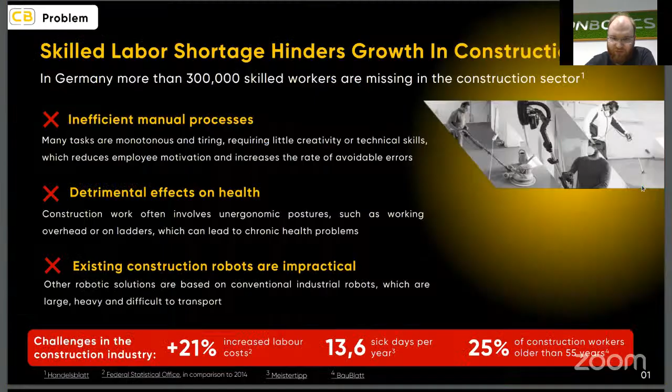Sorry about this. Not used to this laptop.

So basically, the idea is that we want to build robots not at all to replace the worker. We want it to be a tool for the worker, and we want to assist them in doing their job. And the idea is that the robot does the stuff that is easily manageable, that basically just takes time and effort, and it doesn't really make any sense to have a person there to do this, while the painter is still needed for the finer stuff and to really get the job done and also to ensure the quality and so on.

So the quality of the robot is perfectly fine, of course, because in contrast to a worker, it's always doing the same thing. So it's very repeatable, which is also a benefit. So we use less paint, for example, as well. So this increases efficiency. Also, health risks are reduced because, of course, the painting dust is not very good to breathe in. And so that can help with that.

And of course, the bigger issue is also the ceiling stuff, because if you paint the ceilings, you always have to basically spray it in a very unergonomic way. And so this will also, hopefully, increase the health of workers in this area. Right, so the painting robot is the first product that we are developing right now.

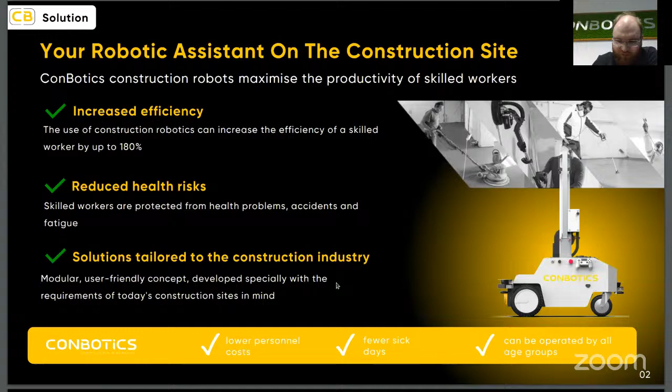Why is it doing this? 1 second. Okay. Yes. Oh, come on. I apologize for the technical issues here. This is not how it's normally going, but... No worries. It's annoying me. I think now I have it.

Okay, there we go. So the basic idea is right now we have the painting robot in development, but like I said, we want to expand in the future. So that means floor coating, which is, for example, for parking decks in parking houses, where you need to coat the floors with specific treatment so that it's more robust, or also sanding, which is basically what you need to do every time you have a new building, that you need to sand the walls first, obviously.

And all those types of jobs are just not good to do. Specifically, sanding and the floor treatment are most of the time very unergonomic. And then, of course, the ceilings as well, like I said. And so we basically want to make tools to help with that.

And in difference to other companies, because this is not the only painting robot on the market, we focus on a lightweight modular build with the idea that we want to be able to have this robot everywhere. So we made it modular, so you can take it apart and easily manage the parts, so you can transport it easier, and you can also bring it more easily into older buildings, for example, where the structural strength might not be as high as it is nowadays in parking decks, for example.

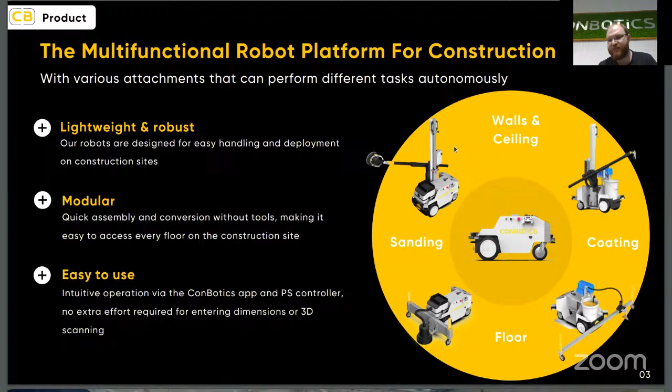Also, ease of use is very important to us. So we basically just want the painter to be able to take up the controller and just start. We don't want there to be any complicated process like scanning the room or anything. So this is all built into the robot. But of course, this means that the robot has to do this itself. Yeah, so this was probably supposed to be a video, but you can see here what I said with the ceiling painting again. Right, I think I covered this basically.

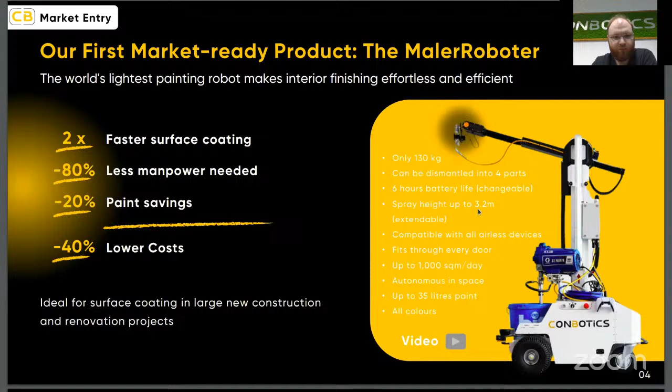Yeah, so key features of the robot are on the right. Basically, we just use an airless system to pump the paint through the robot to the arm and then to the spray nozzle on the top of the arm, and the arm then moves along the wall. Unfortunately, the videos don't work because of, like I said, technical difficulties. But basically, the arm moves up and down along the wall, while the base then moves perpendicular to the wall to basically cover everything. And we repeat that process until it's done.

So the robot arm that we use specifically is self-developed completely from the ground up, because other companies use industrial arms, but those are heavy. And so we wanted a more lightweight solution. So we developed them basically ourselves. And of course, then we developed the software to control all of this as well. And that is also where the AI comes in.

Let's see if there's, yeah, okay.

So what we use the AI for mainly is for ease of use. So when you have a painting robot and you want to cover the walls, you of course don't want to cover everything, right? Like, for example, doors, windows, maybe heaters, you want to just not spray over. So we have 2 cameras on the arm that basically record the room, and that allows us to detect via AI the obstacles on the walls, and avoid them completely, so that we don't waste paint on these areas. And that increases the efficiency.

Also, the important thing is this makes it very easy to use, because other than the obstacles on the wall, we also detect the ceiling height automatically, which means the painter is no longer required to first measure where everything is in the room, or make a complicated 3D scan, or have BIM ready for the whole building. They can just put the robot in there. The robot will automatically, while it's spraying, find everything that it needs to avoid and put these parameters in. So that makes the use of the robot way easier for the painter.

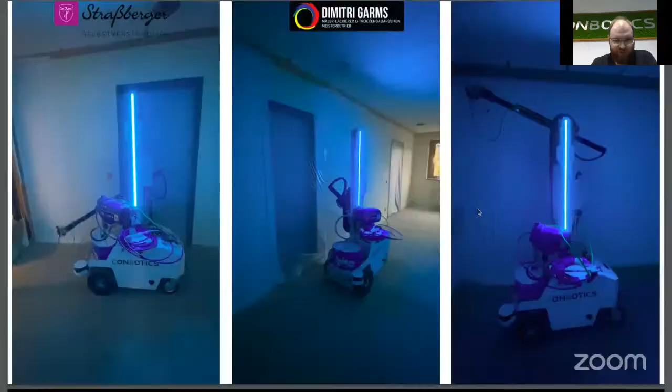So you see here the robot, how it's developed at the moment. And we're already working in a few projects, specifically right now in Germany, and in Switzerland we worked for a bit. So it's already in use.

Unfortunately, I'm not that much in business, so I can't tell you very much about this. But right now we are in a rental phase, so we do not sell the robot right now. That is planned for next year. Right now, we rent the robot out, and we send the robot for a fixed amount per day.

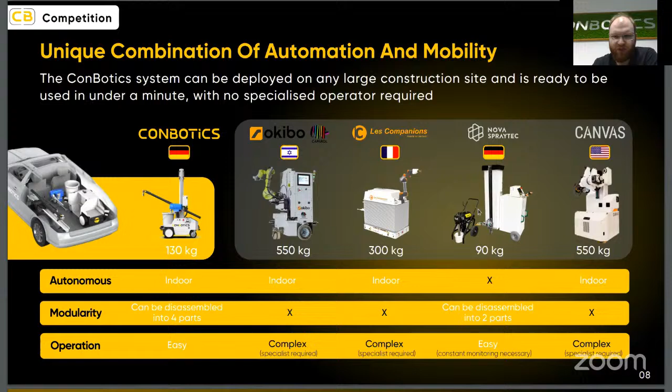Right, here we see some other painting robots. I don't know if this is that interesting, to be honest. But as you can see here, the benefit of our robot is the modularity and ease of use, in comparison to all the others. There are a few more, but those are the main competitors that we have right now that are also in development. So planned, like I said, expansion to other areas will be for 2026. For now, we focus on the painting robot and bringing that on the way completely.

Yeah, basically that's the presentation. So I think I'm done with this.

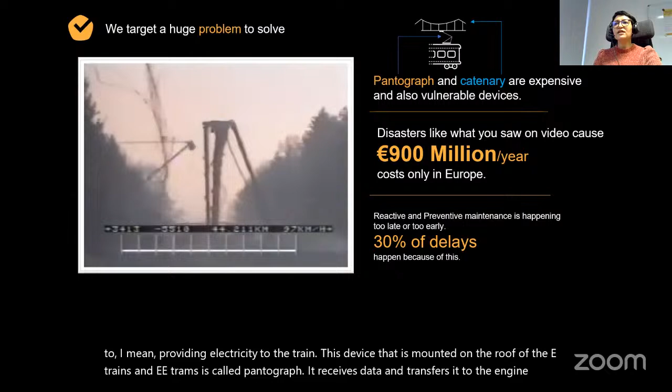So to avoid accidents like that, the maintenance providers should check the quality of the lines from time to time. For example, sometimes they check it every week, and in other cases they use measurement devices and run them under the infrastructure once per 5 years. So they don't have access to online data. The problem is that most of the time they do the maintenance very early, and sometimes it is too late and accidents like that happen.

And all this process increases the cost, which in Europe in general is around 1 billion euro per year. And even worse than that, the delays of the trains and passengers add costs as well.

If I want to summarize the levels of finding the problem in the line, we can divide it into 4 categories, where the more mature one has more reliability and definitely more collected data. The first one is visual inspection, where for example maintenance teams go to the field during the night and just check some specific profiling or maybe very visible evidence of the defect on the line.

The second level, which is very popular now, is that the maintenance team or manager of the infrastructure uses an instrument, for example a measurement train, to collect specific data of the line from time to time. For high-speed trains in Germany it happens once per 6 months, for lines with a lower level of traffic it is once per 2 years, and for most of the cities using trams, it's once per 5 years.

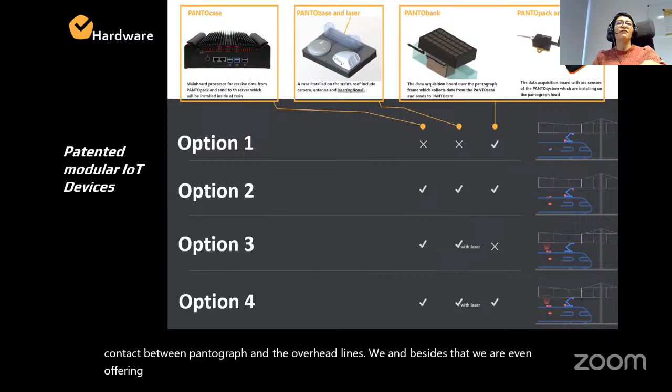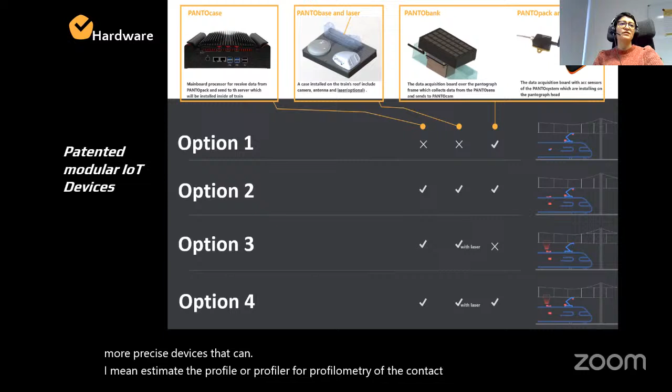The second channel is that if no data is already available, we offer our data collector. We offer different options for collecting different types of data, for example acceleration or visual figures of the contact between the pantograph and the overhead lines. Besides that, we even offer more precise devices that can estimate the profile, or profilometry, of the contact system with less than millimeter precision using laser sensors. So based on our clients' requirements, we offer different devices that can be installed in different parts of the train.

And the third channel is our simulation model. We have heard recently that there are different digital twin models of different systems. But most of them are using 3D models or some specific pictures of that system to generate a model. But in our wording, we cannot just call it the digital twin of that system, because a digital twin can predict or analyze the behavior of that system as well.

What we have done in our company is develop a model that can simulate the interaction between the train, specifically the pantograph of the train, and the infrastructure overhead line. So we are capable of simulating different scenarios of the running train under the infrastructure, and besides that, we can simulate some defects. Therefore, if we call the other digital models just models, the model that we have tried to develop has a kind of soul that can be used to analyze the behavior of the system.

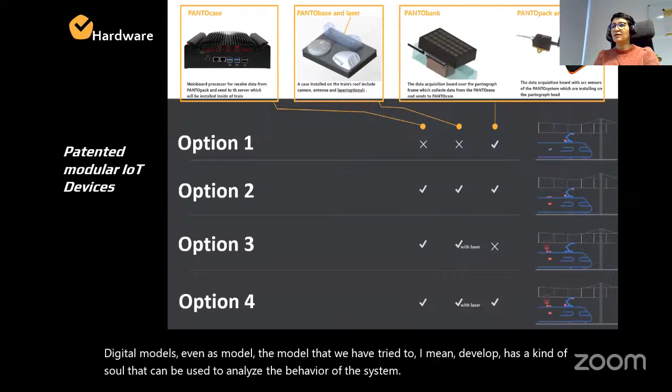So yeah, I know I should go to this side. Okay. After we collect different types of data, we use AI models, machine learning models, to analyze it, detect anomalies, and after that report it to our clients.

In my last slide, I showed how we are doing it. What we can offer to our clients can be categorized as answers to 3 main questions: Where is the underlying problem? What to do to solve the problem, and when is the best time to do the maintenance? How do we deliver it? This is just a screenshot of our panel. It's a comprehensive one where the user can choose the time of the train travel, even the hour of the train travel. Besides that, they have some statistics of the train journey and statistics of the generated defects.

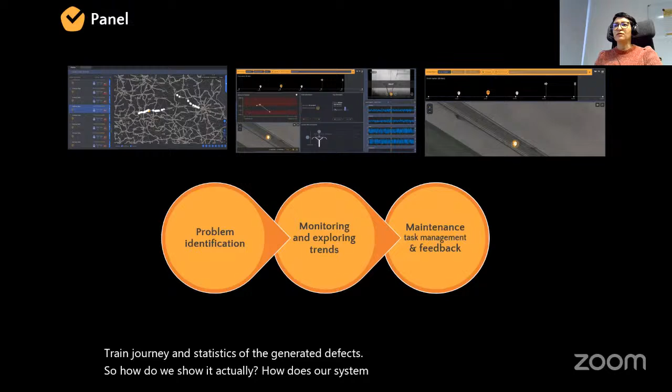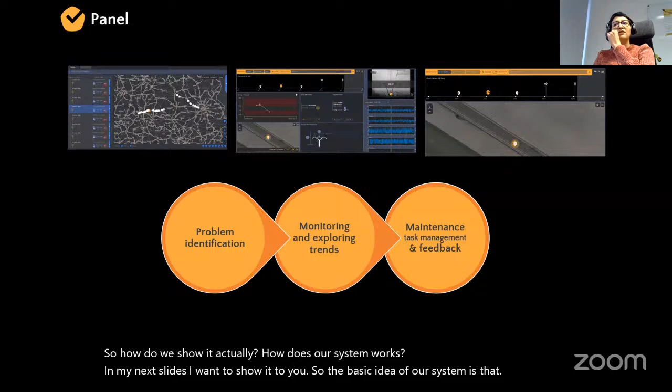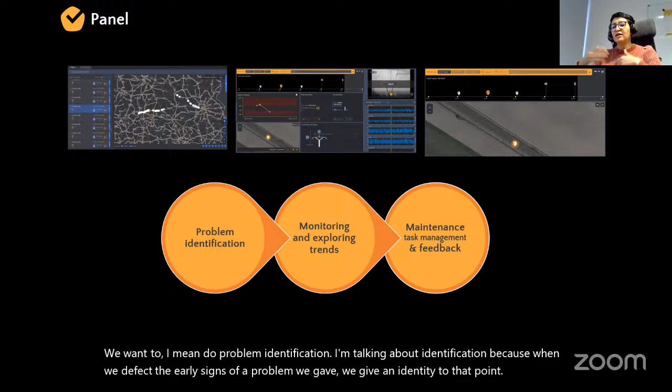So how do we show it? Actually, how does our system work? In my next slides, I want to show it to you. The basic idea of our system is that we want to do problem identification. I'm talking about identification because when we detect the early signs of a problem, we give an identity to that point. And when the trains travel repeatedly... oh, sorry.

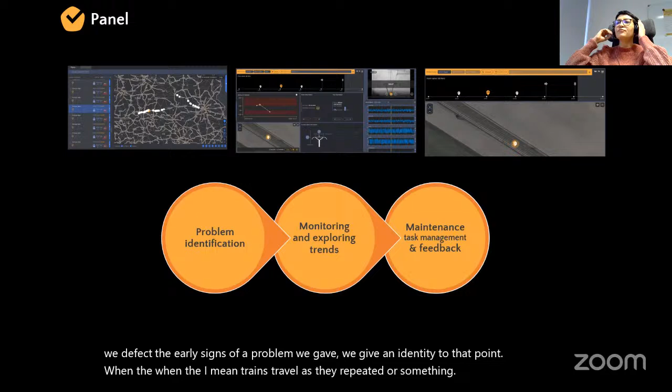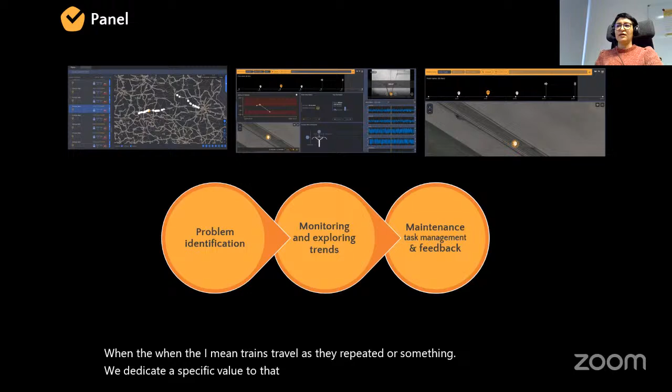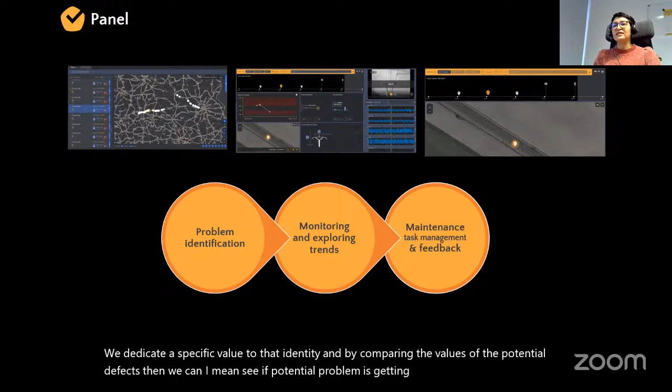So we dedicate a specific value to that identity. And by comparing the values of the potential defects, we can see if a potential problem is getting worse or if it is in the safe margin. And then we can recommend maintenance. In this next slide, I want to just make a summary of what we are doing in our company.

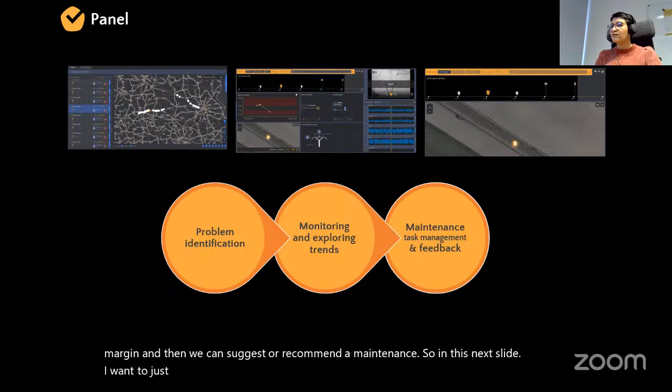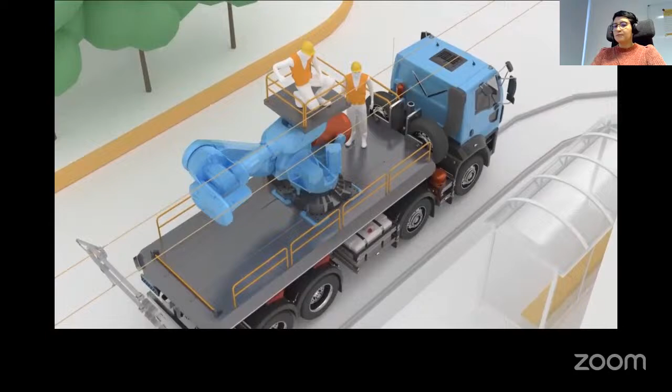Technology has transformed the world over the last 30 years. Cars, phones, computers, everything has changed. But what about overhead contact lines and pantographs? Even today, most companies still check their lines every 6 months to 2 years and record their data on paper, PDFs, spreadsheets, or old-fashioned software. This leads to massive delays, costly maintenance processes, and even bigger problems down the line.

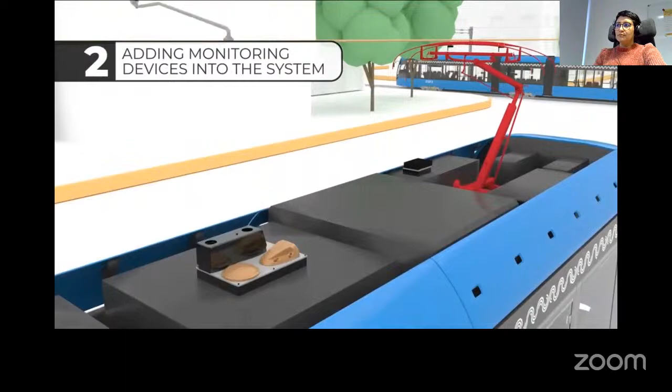Panto Health is on a mission to modernize the entire process step by step. First, we import your current data into our panel, enhancing its readability and efficiency. Then we add our affordable and reliable devices into your system. These devices generate real-time monitoring data, which keeps you updated on any issues. The next step is to process this huge amount of data, extract insights from it, and create a digital twin of your network that helps you monitor all its points.

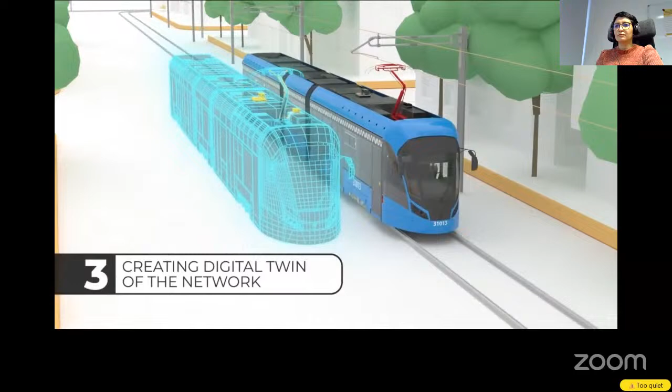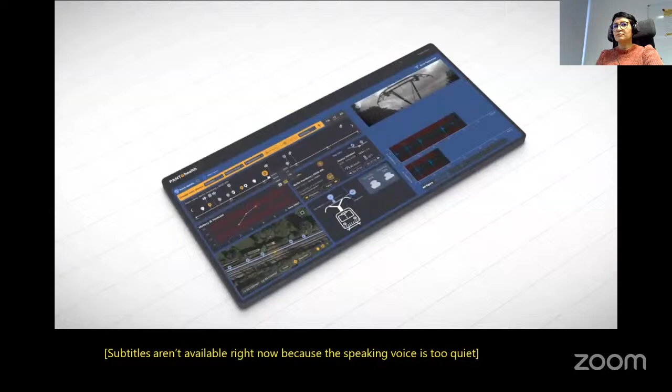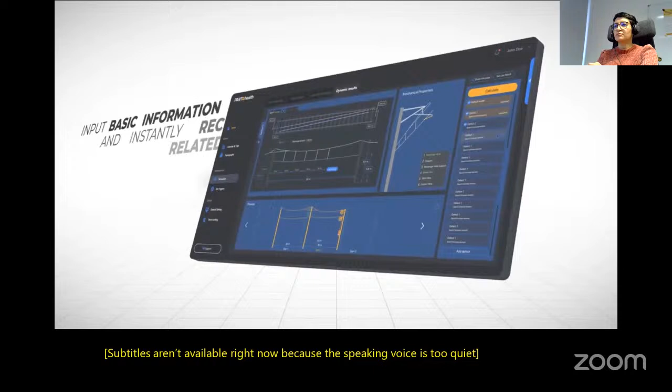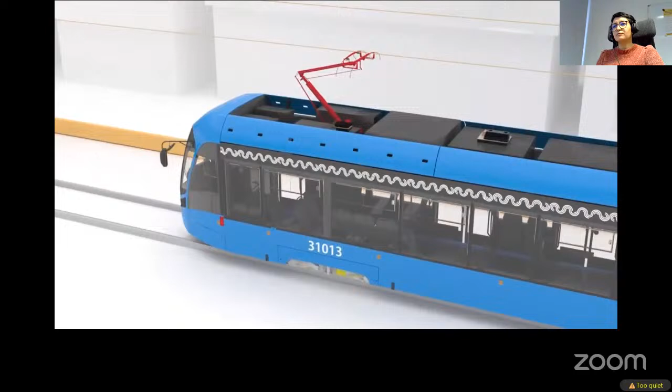By accessing our all-in-one interactive dashboard, you can view the list of abnormalities and easily navigate them on the map. If you require more specific details, click on a point for in-depth details, metrics, and related video, all at your fingertips in moments. With the Panto Health Simulation tool, embark on a 3-stage adventure. First, input basic information and instantly receive related results. Then, model within the system by adjusting pantographs and creating varied scenarios. And finally, receive a detailed report from the panel, which helps in selecting the optimal choice and minimizing real-world risks effortlessly. We provide you with a smart way to achieve the most optimal network with the lowest maintenance costs. Panto Health. Keep your railway system running at its best.

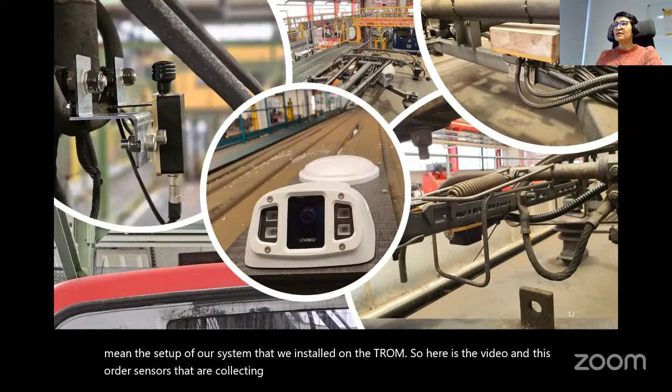So now we go to the last part, which is related to the real cases. Here you see the setup of our system that we installed on a tram. Here is the video, and these are the sensors that are collecting acceleration signals. And then there's a device that collects and sends the rest of the data. Here is another sample that shows how we need to customize our design based on the different designs of the train and pantograph. The camera is installed here.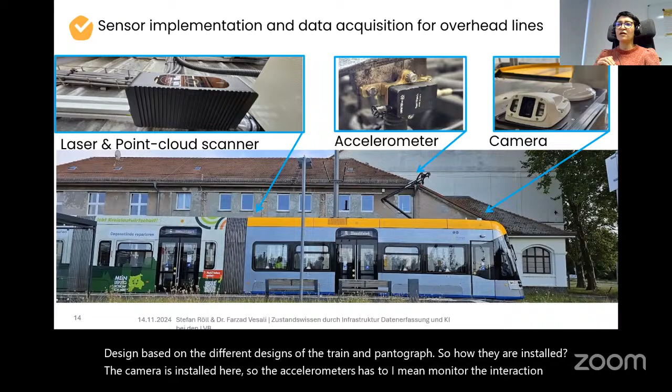The accelerometers have to monitor the interaction between the pantograph and the lines. Therefore, they should be as close as possible to the infrastructure and the contact point. And the other devices, for example a laser scanner or in some cases a point cloud scanner, can be installed on the roof of the train as well.

How are we using it? When one train passes a specific point and the sensors receive considerable shock, as I told you, we save the location of that specific point. And at that specific time, based on our own analysis, we allocate a score to that specific point of the line that we call the health index of that specific point.

When the tram or train travel repeats, in some cases that health index increases. So it means that the infrastructure is in a healthy situation, or maybe the data that we received from our sensor was noisy or had some problems. But whenever it shows that the chance of a defect or the risk of the line is increasing, the health index reduces. And it is all happening based on the repeated data. As I told you, continuous condition monitoring of the interaction between the device, the pantograph, and the infrastructure.

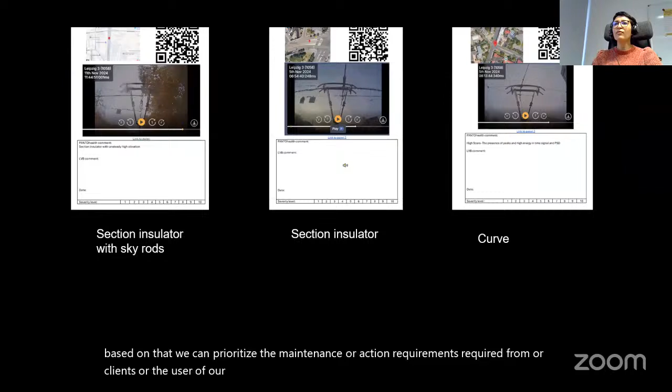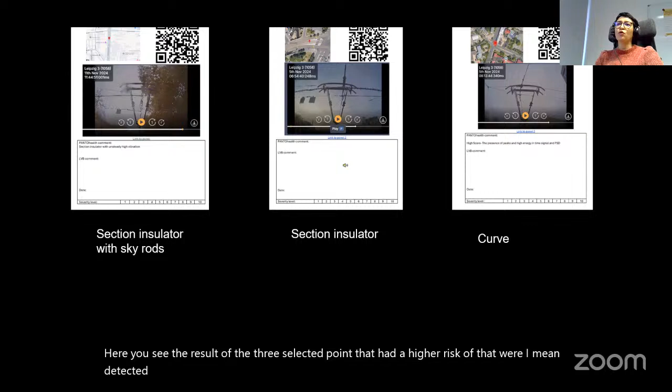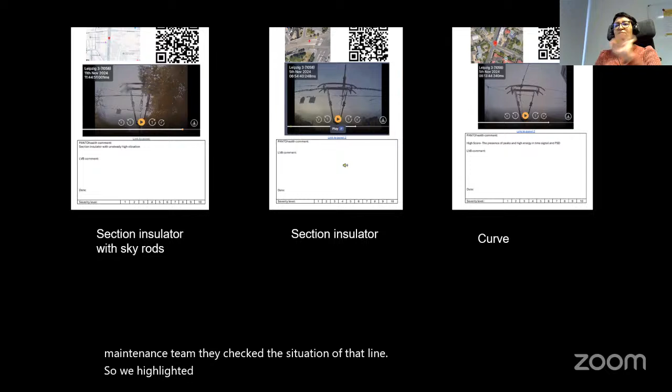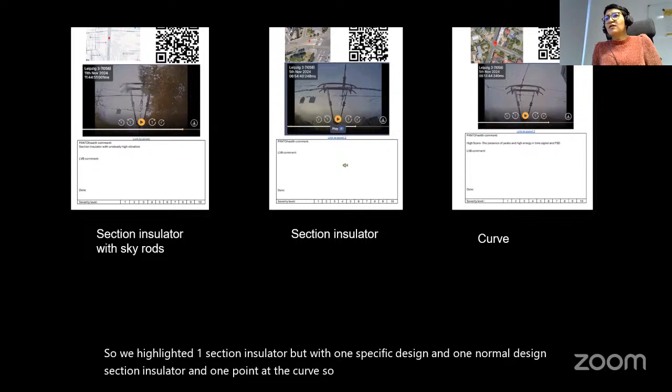Here you see the result of the three selected points that were detected as high risk points, where one of my colleagues went to the field and, with the maintenance team, they checked the situation of that line. So we highlighted one section insulator with one specific design, one normal design section insulator, and one point at the curve. For those specific points, the vibration, and specifically lateral vibration, had significant evidence that something is not normal there.

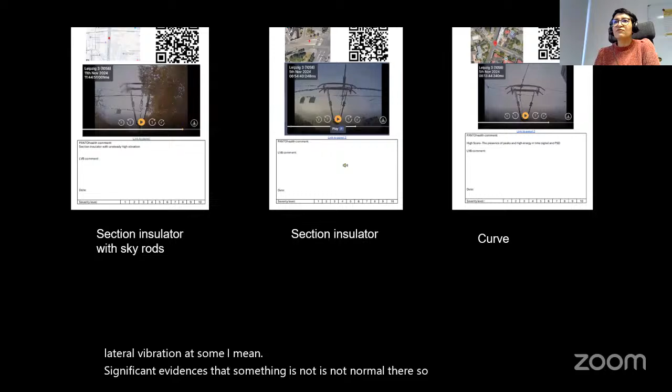So first, I go to the first point. The first point, I told you that it has a specific design. This specific design they call a sky rod actually supports the pantograph to have a smooth contact with the contact wire. But when the train was traveling, it faced an impact or a shock at the beginning of the contact point.

And when my colleague went to the field, he noticed that at the entrance, you can see here there are some wears, because of the high speed of the tram and the impact that this rod faced. So we asked the maintenance colleague to adjust the height of these two tiny wires. You cannot see them; they are actually handling the weight of the section insulator.

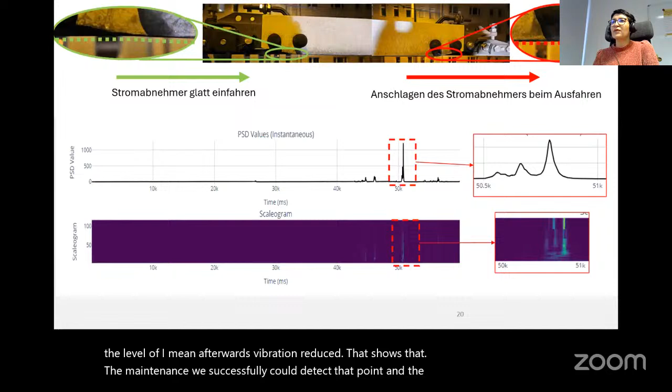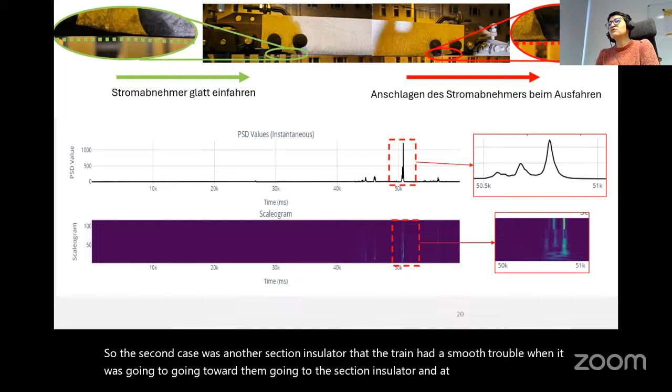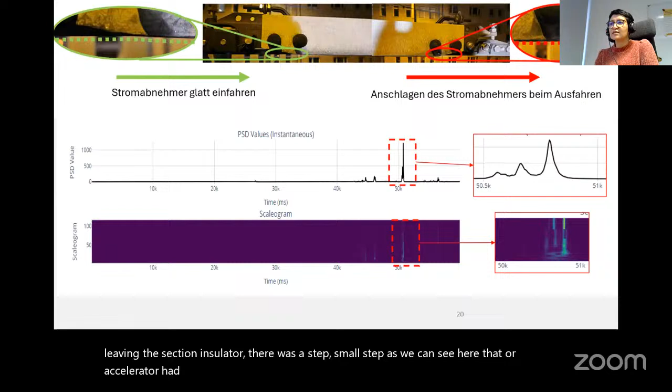So the second case was another section insulator where the train had a smooth travel when it was going into the section insulator, and when it was leaving the section insulator, there was a small step, as you can see here, where our accelerometer detected some impacts. And here, based on the scalogram results, you can see that the energy of the exit part was higher than the entrance. And the videos that we recorded show the same thing as well.

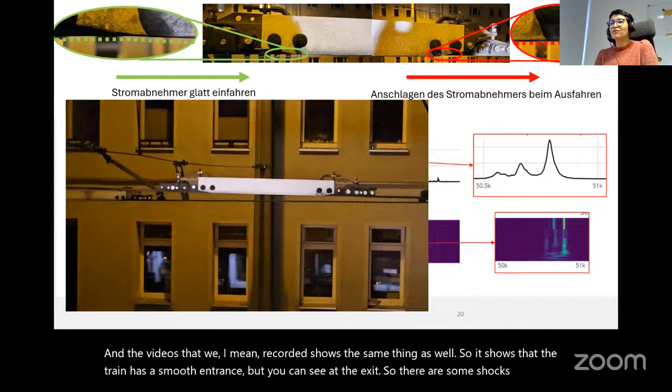So it shows that the train has a smooth entrance, but you can see at the exit there are some shocks. But unfortunately, the maintenance colleague for that specific part of the line was not with us that night, so this part was not repaired.

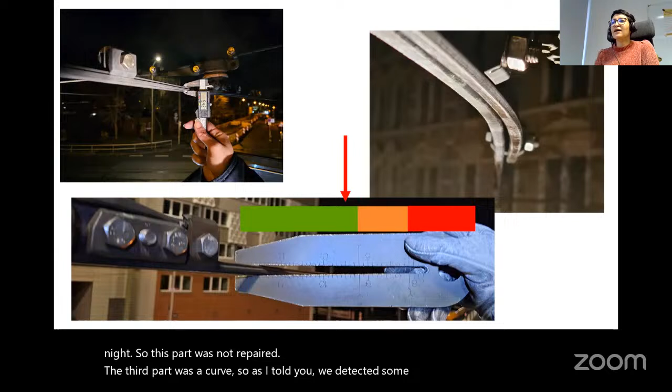The third part was a curve. As I told you, we detected some abnormal vibration there. And when my colleagues went to the field, they noticed that the thickness of the contact wire, which is a very important factor for the safety of the line, is getting closer to the risky part.

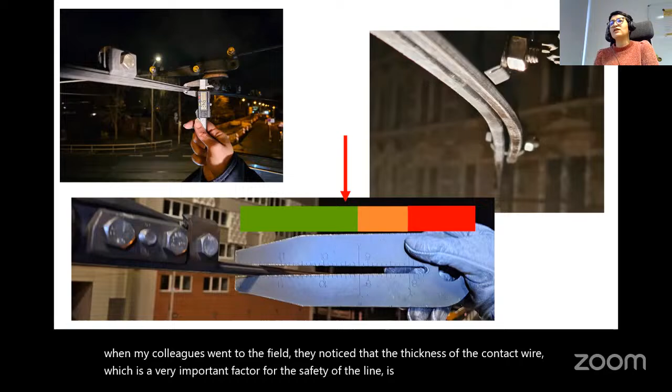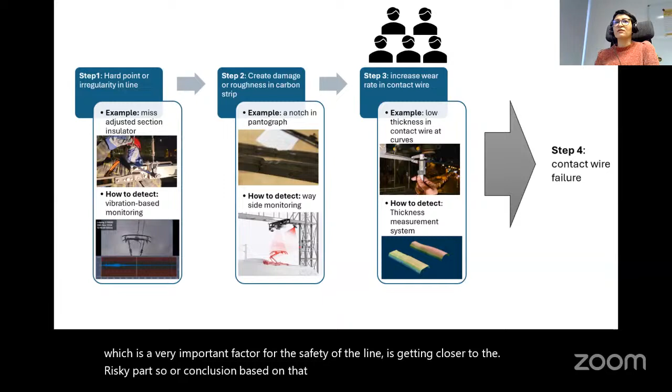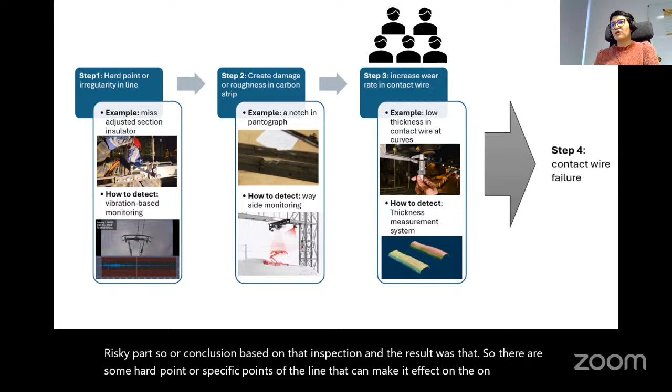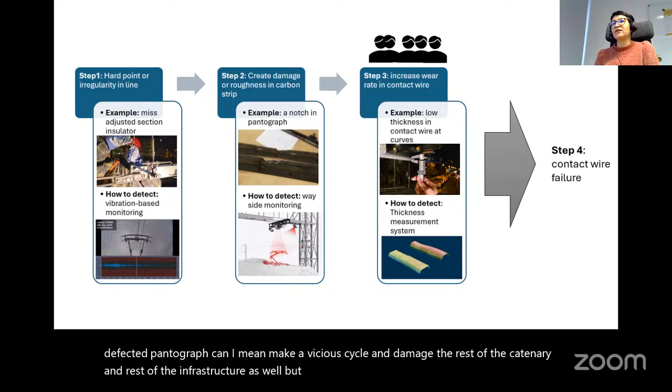So our conclusion based on that inspection was that there are some hard points or specific points of the line that can make a defect on the pantograph, and a defected pantograph can make a vicious cycle and damage the rest of the catenary and infrastructure as well. But there should be a way to break this cycle.

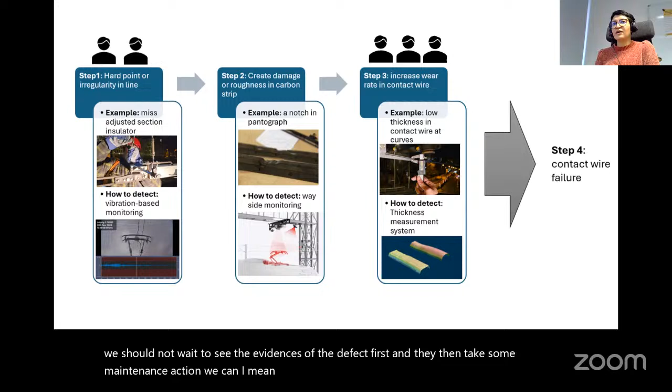What we're suggesting is based on collecting continuous data. We should not wait to see evidence of defects first and then take maintenance action. We can detect the signs of an upcoming problem and allocate human resources to fix it before an accident happens.

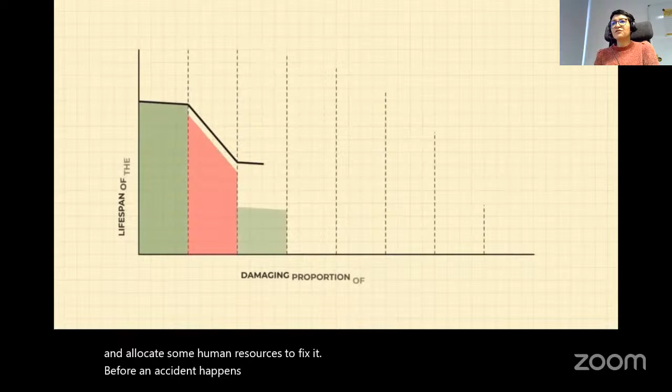How it will generate value: at the beginning, it shows that defected points can decrease the lifetime of the infrastructure considerably. But if we solve the problem at all risky points, then the lifetime of the infrastructure as a whole increases.

So yeah, that was all about our company, and I hope you could get what we are doing. If you have any questions, I'm more than happy to answer.